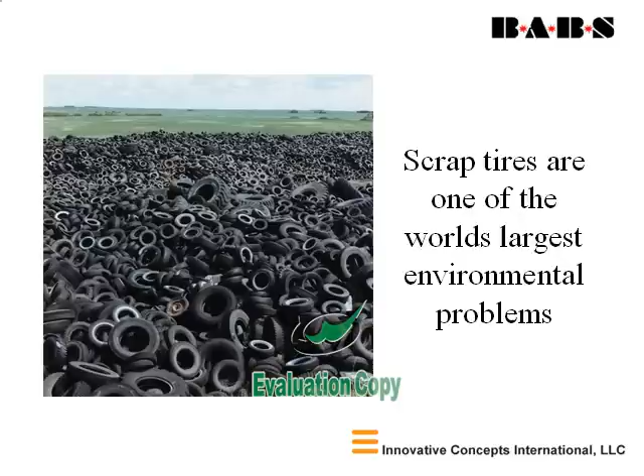Scrap tires are one of the world's largest environmental problems, causing storage and disposal issues, as well as pollution and health concerns. Tire piles are prevalent throughout the world. However, many current applications for scrap tires involve burning them for energy or shredding them to put into landfills, both of which cause long-term environmental issues.

Terrorist attacks and war zone activities are a growing problem causing major disruptions to everyday activities worldwide. BABS blocks have been developed and created as a solution to help with both of these international problems.

BABS blocks can be custom-made and installed for each specific and unique application. The basic concept is to utilize the polymeric properties of the base material to deflect and absorb energy in a form that is easy to move and to stack.

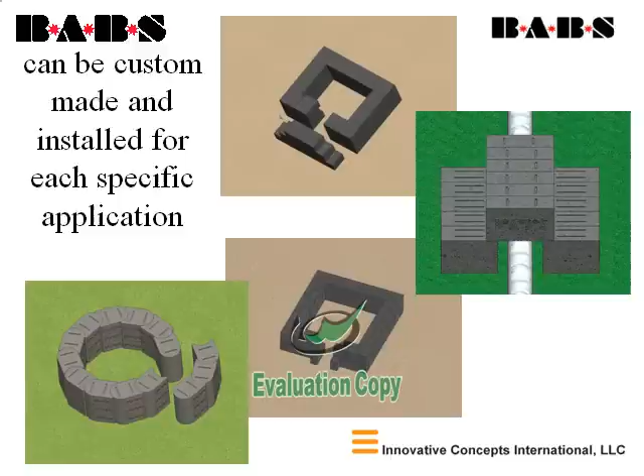Here you see some conceptual models for perimeter protection, building protection, and pipeline protection. These are some of the many applications for the ballistic absorption barrier system. The standard BABS block is 3 foot, or approximately 1 meter tall, and 6 foot, or approximately 2 meters wide. BABS blocks can be stacked to create a wall formation.

The EcoBlok is another product constructed from recycled scrap rubber tires. The EcoBlok is similar in size to 2 sandbags and weighs 30 pounds, or 13.6 kgs. The EcoBlok is very portable, stackable, and reusable.

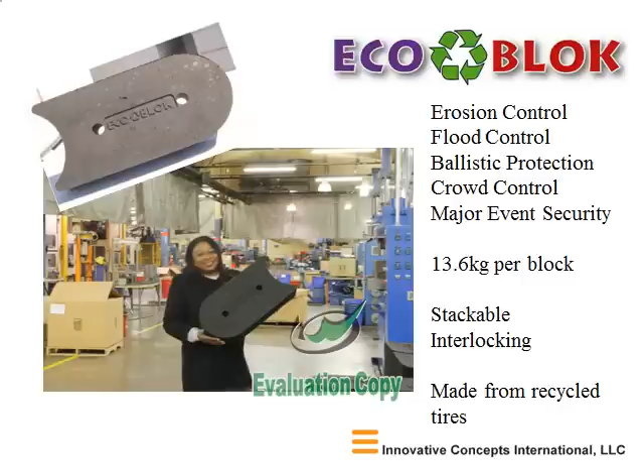EcoBloks are designed to interlock, and they have vertical holes to allow for the ability to stake them together or into the ground for added strength. EcoBloks are used for flood protection, erosion control, as well as small blast and ballistic events.

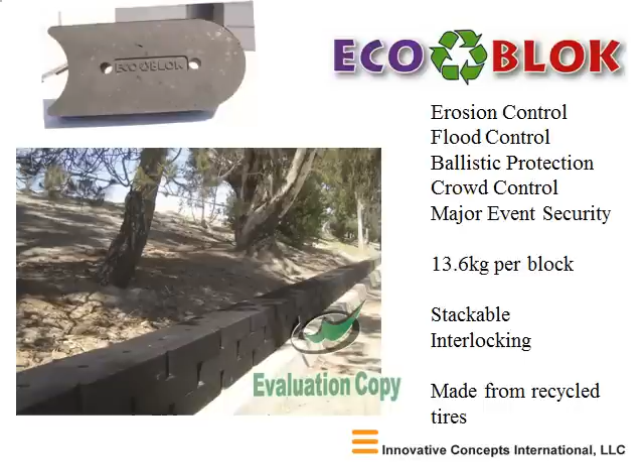In the picture on the screen, you can see a wall of EcoBloks being used for erosion control on a hillside next to a highway system. The EcoBloks stop the soil from flooding onto the roadway and then can be removed and reused after the erosion problem is resolved. These pictures show the EcoBlok during ballistic testing.

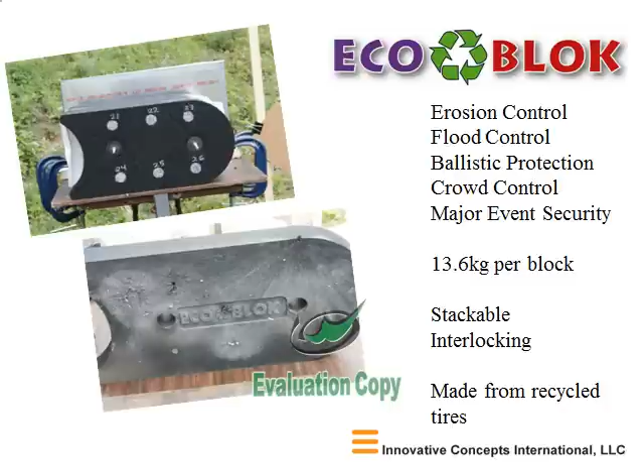Ballistic testing has been performed using a variety of ammunition to measure ballistic resistance. BABS have also been designed for ease of movement and quick deployment. They have been constructed to be positioned similar to building blocks, and they are portable and reusable.

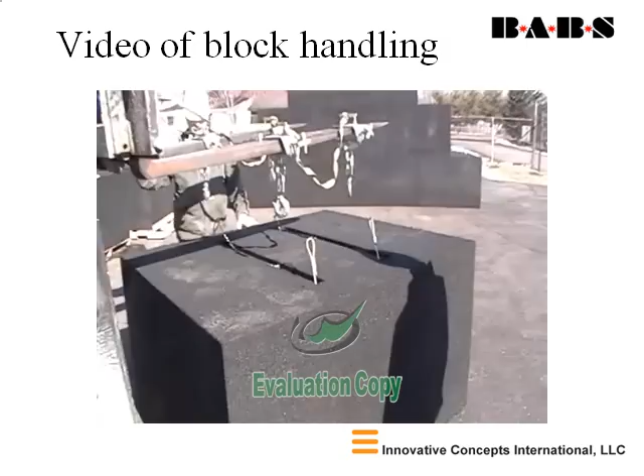The basic BABS block design has been built for quick installation using a lifting system built into the blocks for ease of movement. With the shorter hook system used, the BABS blocks can be moved quickly into precision formations, as well as when total operating height is a concern.

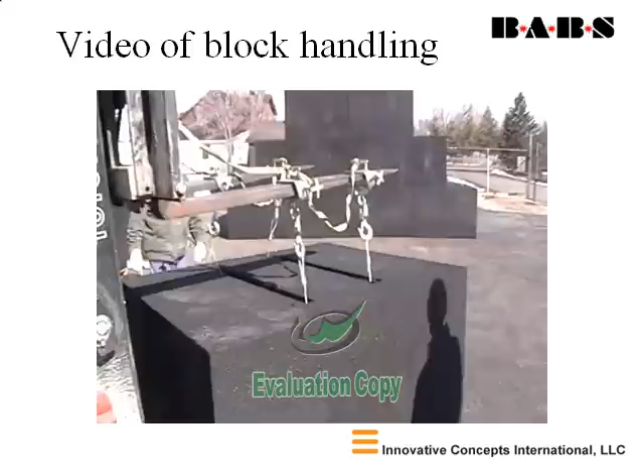During installation, BABS blocks can be moved closer together, or after the wall experiences a blast event, any shifted blocks can be repositioned with a forklift or any heavy equipment. The BABS blocks have been tested in repeated blast events without post-test handling, and the blast attenuation has remained consistent behind the wall.

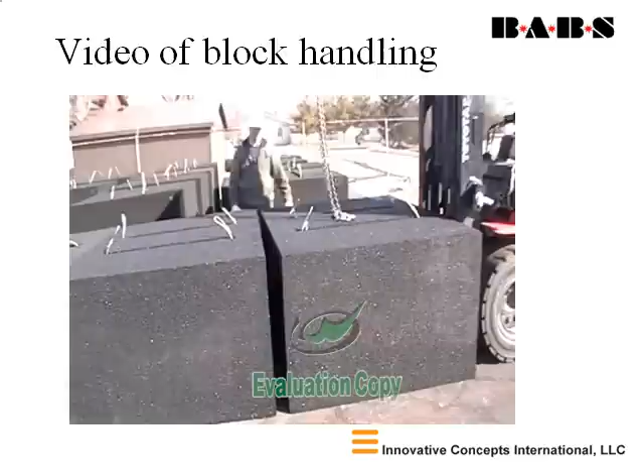The BABS blocks have been tested in conditions with the face of the blocks flush, as well as when the blocks have slightly different depths. Each setup has shown excellent blast absorption and attenuation.

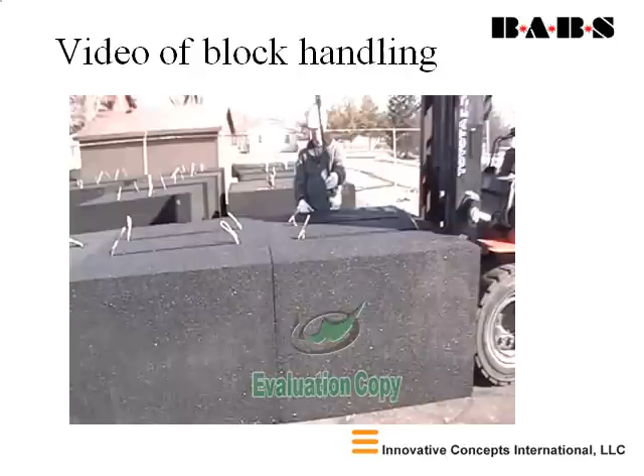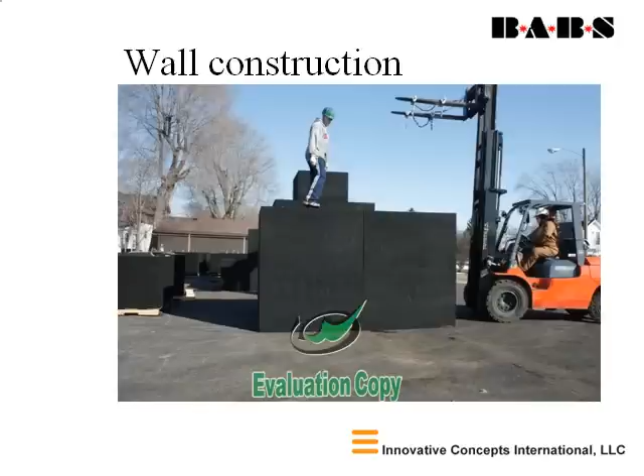BABS wall construction can be built with minimal personnel and the most basic heavy equipment. During installation, BABS blocks can be moved with a hook and chain system for ease of movement and quick installation. BABS can be stacked in different configurations for large and small blast events.

In the summer of 2009, ICI exhibited and tested the BABS product at the FPED 7, Force Protection Equipment Demonstration, in Quantico, Virginia, which was sponsored by the U.S. Department of Defense. The BABS was subjected to both blast and ballistic testing during the demonstration.

In December of 2009, the BABS product underwent 6 days of blast survivability testing at the U.S. Army Aberdeen Test Center, located at the Aberdeen Proving Grounds in Maryland. BABS test data and details are restricted to personnel with ICI-approved clearance.

The test plan was devised in coordination with the U.S. Army Aberdeen Test Center to simulate real-life blast events. The BABS blocks were placed in a wall configuration with a closed end and an open end.

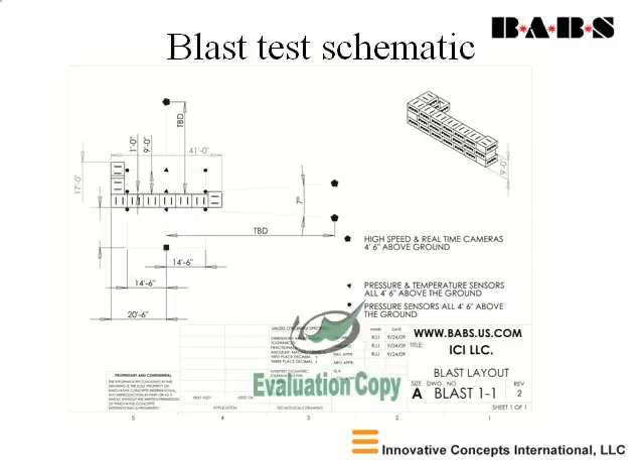The charge was placed at a standoff distance from the center of the wall, and pressure and temperature data was collected in multiple places on the front of the wall, on the back of the wall, and at distances behind the wall. Slow motion video was used to capture the events.

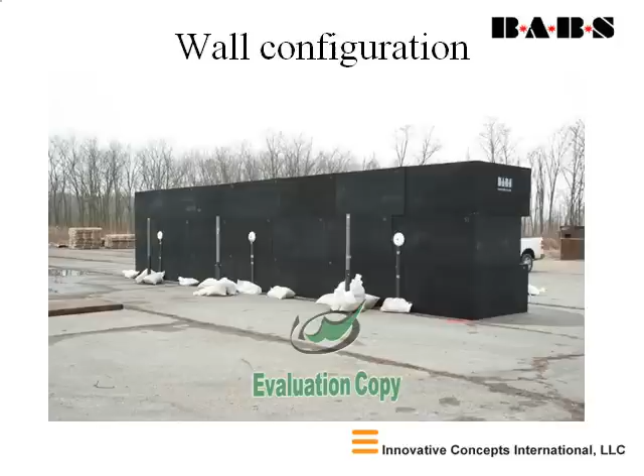On the front of the wall, pressure and temperature gauges were attached to the face with metal pipes and angle iron to protect the sensors from blast debris and allow for accurate data collection. The blast charge was placed on a metal plate on the ground to simulate a worst-case blast event with maximum pressure.

Here you see the open side of the wall configuration. This is used to simulate an opening in a perimeter wall application.

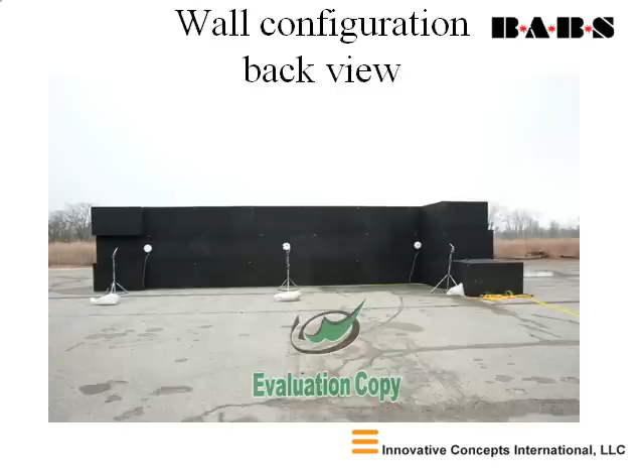In the back view, you can see the temperature and pressure sensors on the back of the wall and sensors placed behind the wall to measure the overblast pressures. Here you see the closed side of the wall configuration. This represents a corner of a perimeter wall configuration.

On the following two blast videos, you will see a blast event from the side of the wall focusing on the front face, and then the same blast from the back of the wall.

This video shows the same blast from the back of the wall. The camera is positioned so that the top of the screen is flush with the top of the wall. You will see a bright light from the blast, and you will also notice no disturbances or movement to the sensors or sandbags behind the wall.

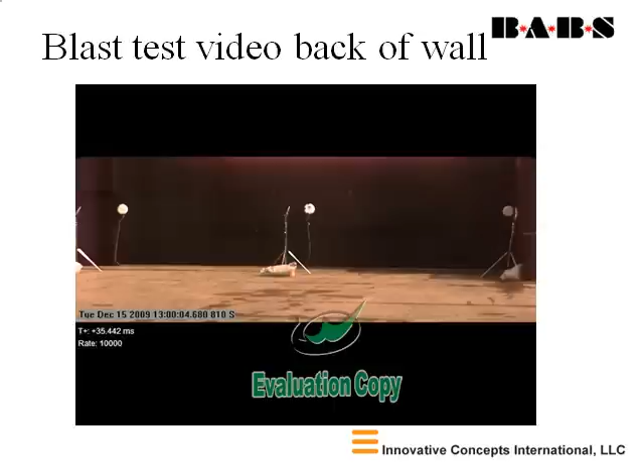The results from the blast event showed excellent blast attenuation of over 99% at the center of the wall where the blast pressure was greatest. There was virtually no increase in temperature, and the pressure measured behind the wall was below the human threshold for eardrum rupture. The attenuation on the left and right of the wall was lower due to the lower blast pressure on the front of the wall in the corresponding positions.

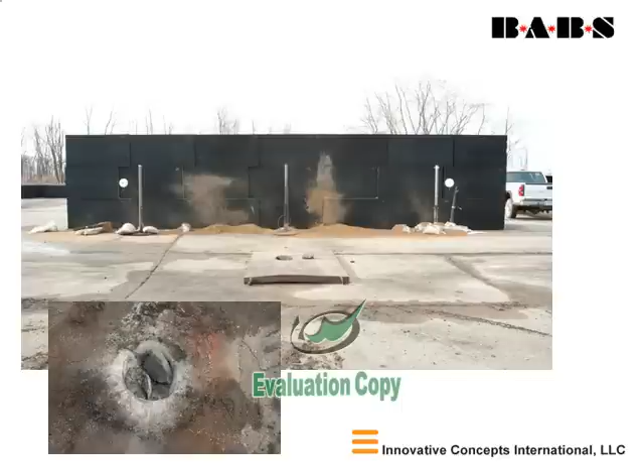The following pictures show the blast area and BABS wall after the blast event. The charge used created a hole through the 4-inch steel plate and over 1 foot deep into the concrete below the plate. After the blast event, the BABS wall was intact with only small movements between the blocks from the vibration of the blast. The alignment of the wall was still intact.

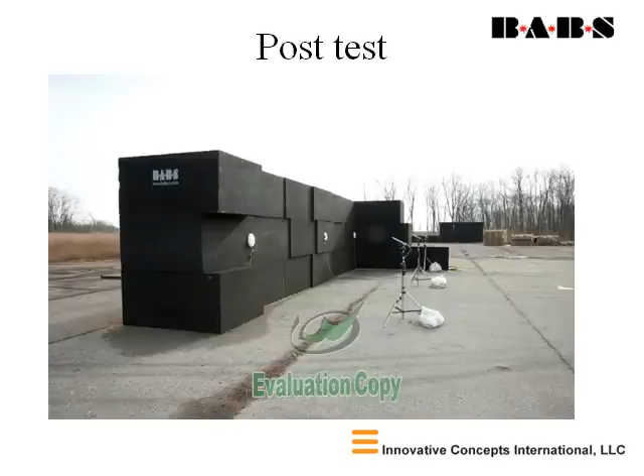There was no damage on the back side of the wall. There was no damage on the closed side of the wall. The second blast event was performed with the same wall configuration, but with a closer standoff distance from the blast. The results were similar to the first test, with the BABS wall in place with no disturbances behind the wall.

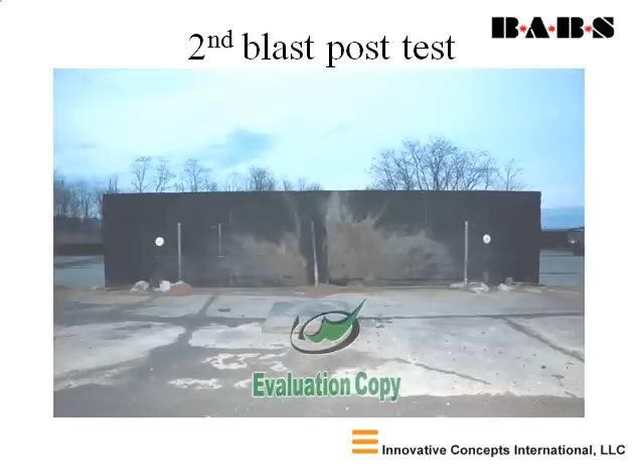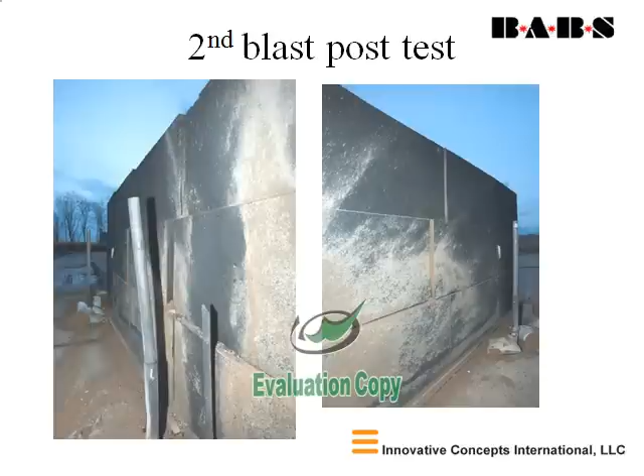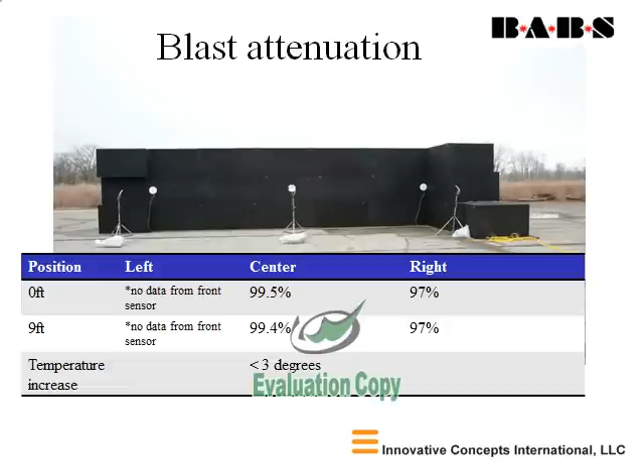The blast pressure caused the metal pipes protecting the pressure sensors to hit the wall with such force that they were bent. However, no damage occurred to the face of the wall. The blast attenuation was excellent, showing over 99% attenuation at the center of the wall with less than a 3-degree temperature increase measured behind the wall.

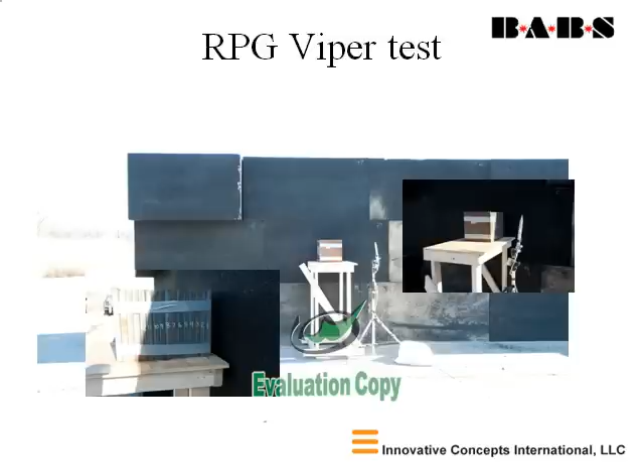The next set of testing involved a shape charge RPG positioned in front of the wall. The RPG was positioned at an arming distance from the face of the wall. 16 1-inch steel witness plates were placed in position behind the wall to measure the effectiveness of a BABS block during an RPG blast. The following video shows the ignition of the RPG shape charge and the blast energy and fireball on the face of the wall.

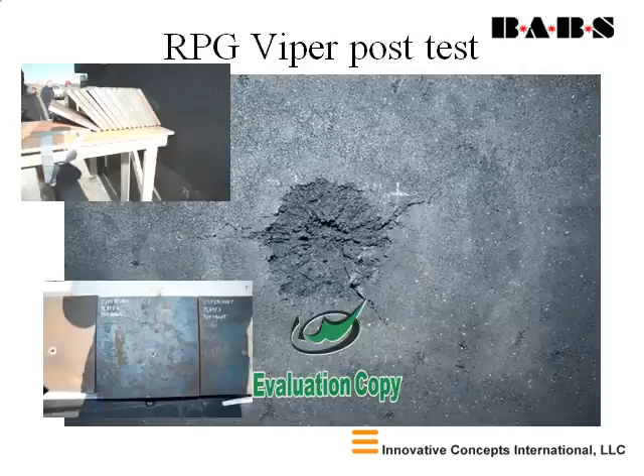The entry point of the RPG charge created a self-healing hole, leaving no line of sight through the wall. The charge penetrated the BABS block and traveled through 2 of the steel witness plates, splashing down on the 3rd plate. The BABS block showed similar capabilities to that of 14 inches of steel in the RPG shape charge testing.

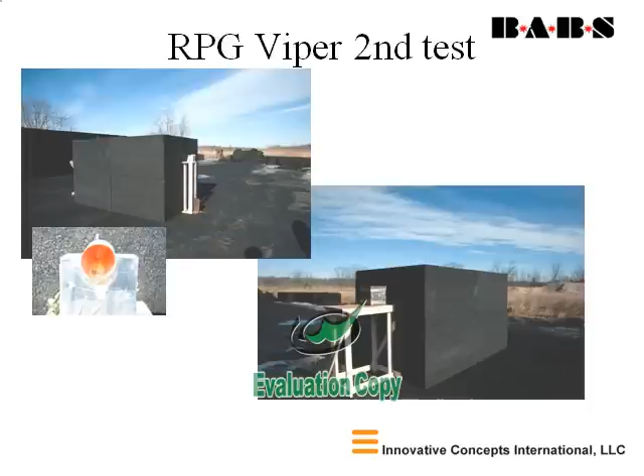Next, the same RPG testing was conducted on a BABS configuration with a depth of 2 standard size BABS blocks. This configuration would be similar to a perimeter wall application. The RPG entered into the second BABS block, stopping at a distance of 6 inches or 15 centimeters.

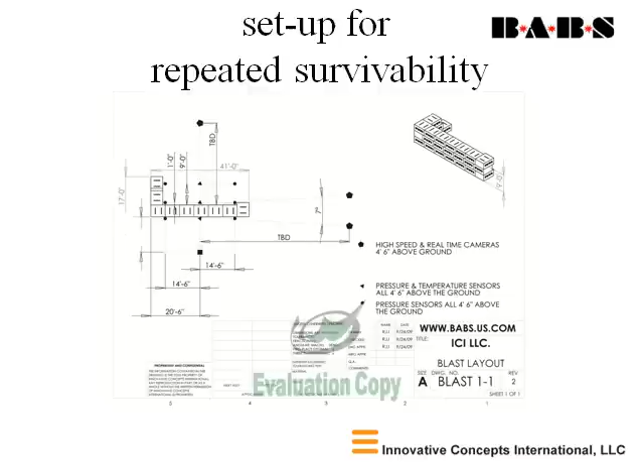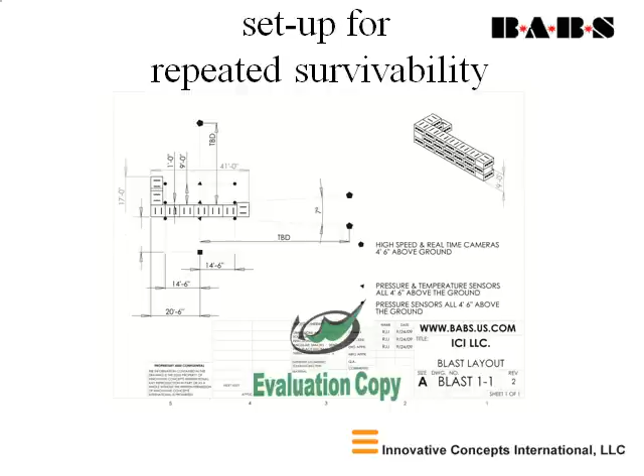The final set of tests was designed to test the survivability of a BABS wall during multiple blast events. The wall was set in place and 3 blast events were conducted without adjusting, replacing, or moving any blocks between blast events. Additional sensors were added to prove the absorption properties of the BABS wall.

If the blast energy was simply being redirected, it would be expected that at a distance behind the wall, there would be an increase in pressure as the redirected energy waves continued along their path. The testing confirmed the absorption properties of the BABS blocks. The collected data showed a reduction in blast pressure as the sensor distance increased behind the wall. This proved that the blast energy was absorbed and not simply redirected.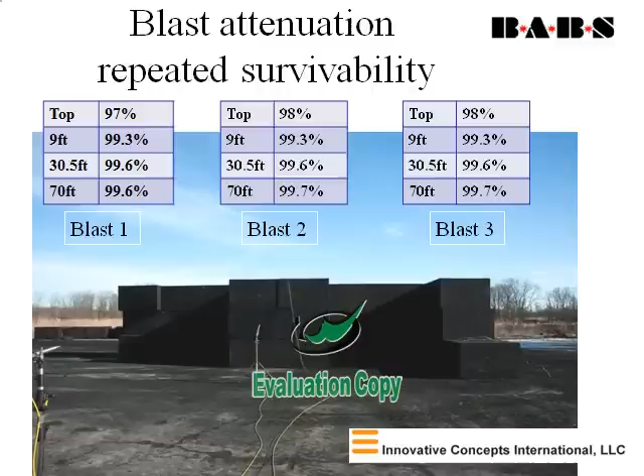Through all 3 blast events during the repeated survivability testing, the BABS wall not only showed excellent attenuation of over 99%, but also proved that the BABS wall was absorbing blast energy. Nearly identical attenuation results were recorded after all 3 blast events.

In April of this year, the BABS and EcoBlock products were displayed at the Counter-Terror Expo in London. Innovative Concepts International utilized this platform to showcase our products to the international community. An advertising campaign was built around the event and specifically in the event guide, where ICI sponsored many high-profile sections for maximum exposure. To best represent the scale of the BABS product, the exhibit booth space was constructed utilizing a wall of 15 BABS blocks and a separate wall of 50 EcoBlocks.

Small model displays were also presented along with banner displays and brochures. The overall effect of walking into the corner of the booth surrounded by BABS blocks allowed visitors to feel and hear the effect of the energy absorption properties of the product. Many new contacts were made during the show, and the potential to expand the product line within Europe is very promising.

During the exhibit, we were given the opportunity to make a presentation introducing the BABS and EcoBlock products. The presentation was titled Recycle, Reuse, Protect. It was given as a case study explaining the benefits of using recycled rubber scrap tires to produce energy-absorbing products.

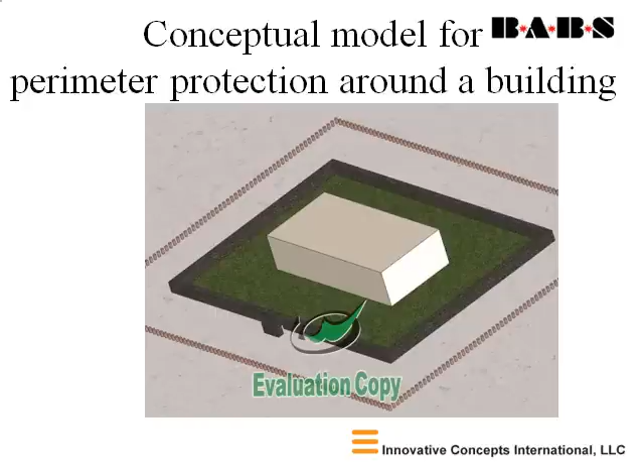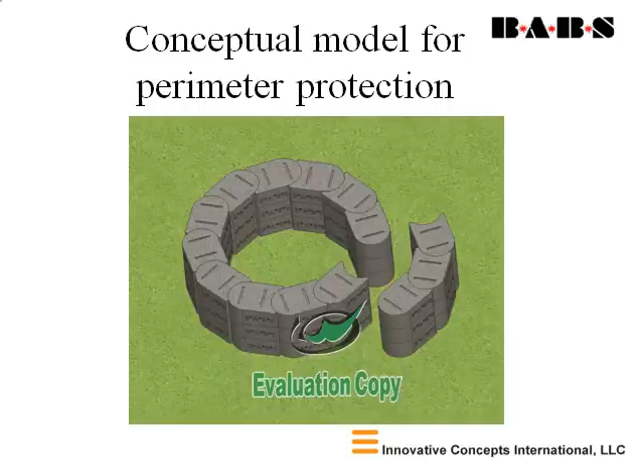For suspect packages, vehicles, or even airplanes, BABS blocks could be used to mitigate the effects of a blast. The BABS blocks can be custom made and designed for different applications. Here's a perimeter protection application using a different style block.